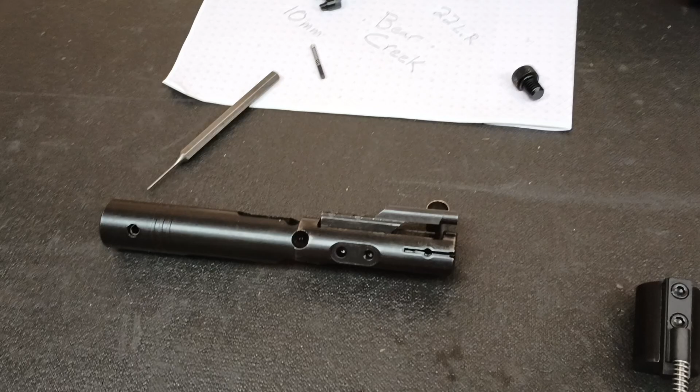The problem I found just with my tabletop review and inspection is that my extractor, this is the bolt carrier group for the Bear Creek .22 long rifle, but we can see pretty good with this one, if we get this to focus, how the extractor is supposed to work.

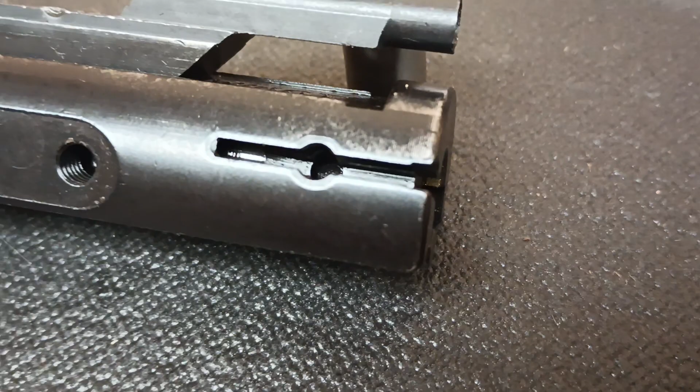It is supposed to reach around and grab the rim of the cartridge, hanging onto it so that we can pull the stuff back out of the action. The problem I had with this 10mm is the extractor stopped short. It did not claw around and grab a hold of the rim.

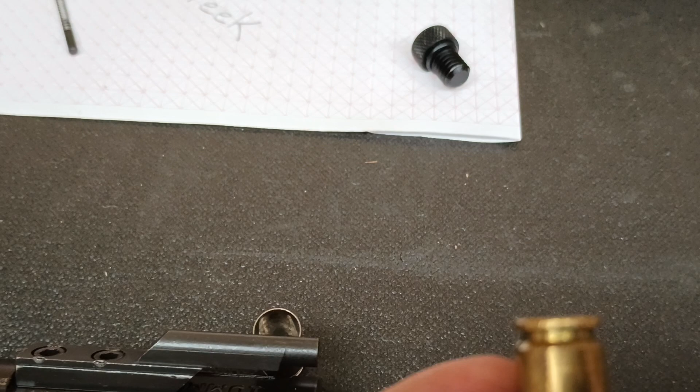So this rim thickness is about 0.050 to 0.051 inches in thickness, and so our extractor did not exit the bolt far enough forward to grab the rim.

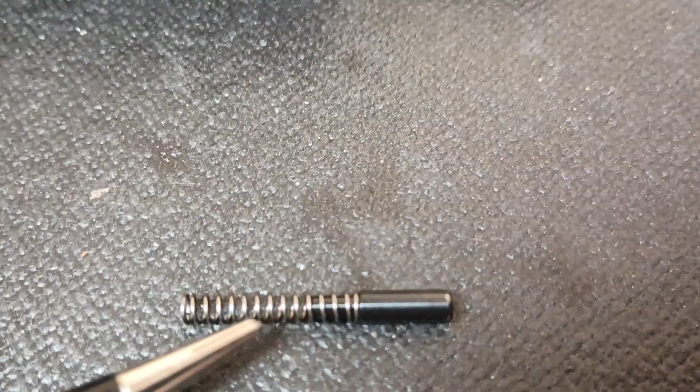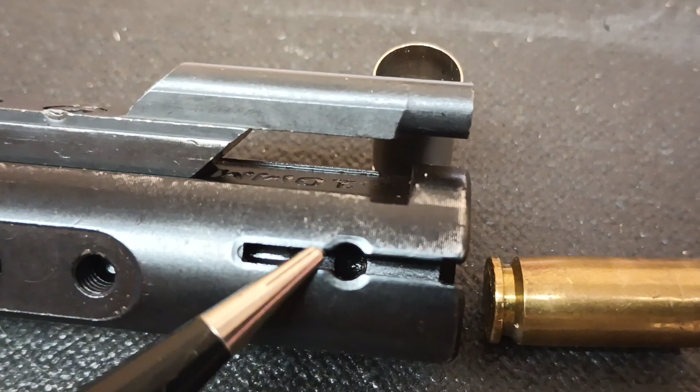So you can see this pocket here. The extractor fits in that pocket. There is this spring assembly. The spring and pin slide into this groove. The spring gets compressed, and then the pin pushes up against the back side of that extractor that is captive in that pocket.

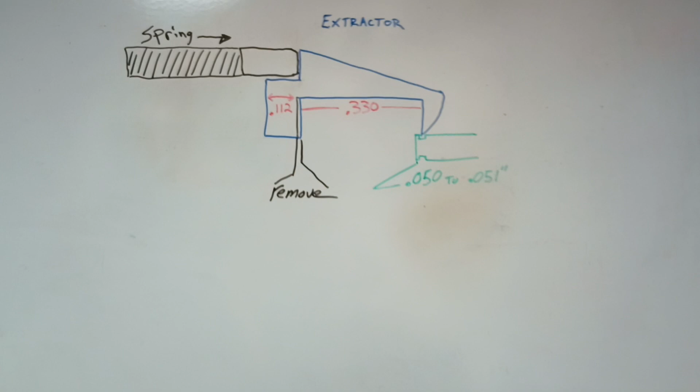If I'm not grabbing the rim, that either means that my pocket is in the wrong spot and needs to be moved forward, which is a little bit difficult to do in the field on the bench at home, or perhaps we can just modify our extractor so we've got about 0.330 inches worth of a gap between the claw and the foot of the extractor.

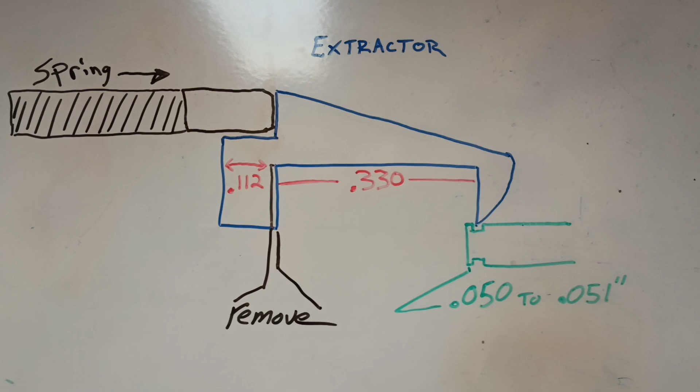So our rim again is about 0.050, and our spring tension pushes on the back. So therefore, if we remove this little sliver of metal in the back, that should allow the whole extractor to feed forward up against the bolt face and give us more extension beyond the bolt face to be able to grab the rim of the cartridge.

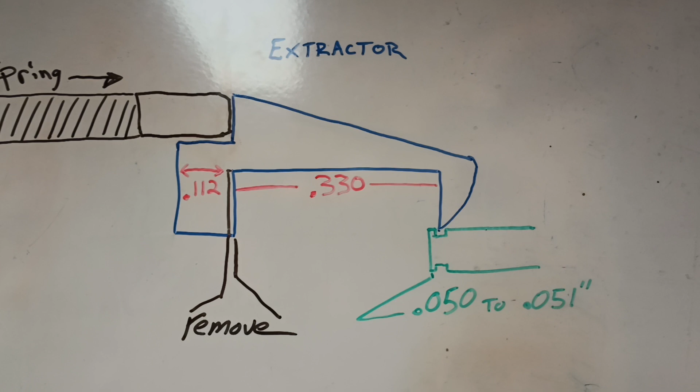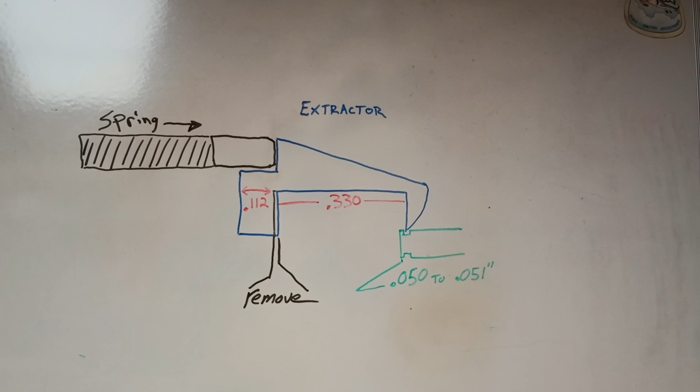So currently the foot of this thing is about 0.112 inches. So the trick is going to be hand fitting it, removing a sliver of metal and doing a test fit. So right now I know what my dimensions are. We've got that stuff mapped out, and we can grab our bench tools and start carving away.

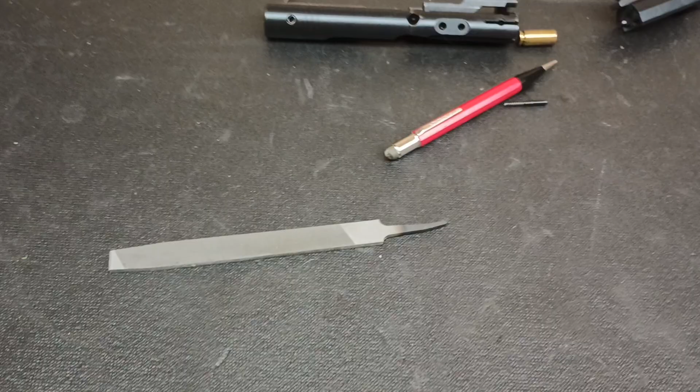So I'm going to spare you the boring details of material removal, since it is just a tiny little part, and as much as my camera's shaking, you'll probably get driven nuts, so be right back.

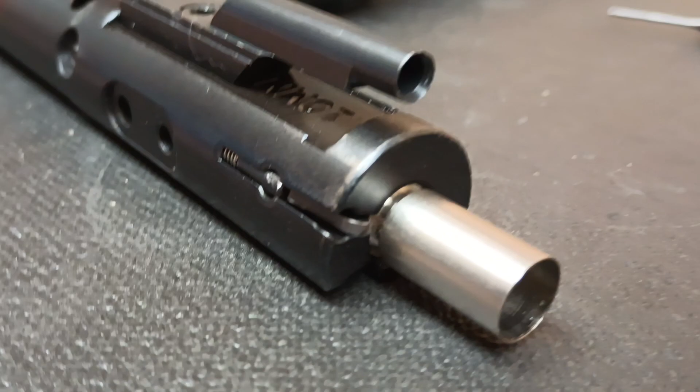Alright, I've removed a little bit of material off that back side on that foot, but we still aren't quite gripping that rim yet.

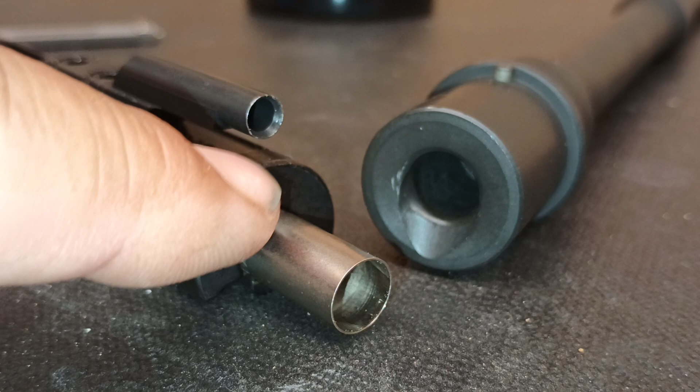Another observation I had is we are now extending a bit beyond our bolt face with that extractor. So one consideration is, and this is the spare barrel, since we're a blowback, our bolt face and our barrel breech are just kind of square cut. This is dished in though a little bit, so it's got a radius cut here with a feed ramp.

So I guess the consideration is making sure that my extractor does not stick out too far to become a problem with the seal when the bolt face comes in contact with the back of the barrel. These cartridges headspace internally. This is a 40 Smith & Wesson, so it's a little bit shorter.

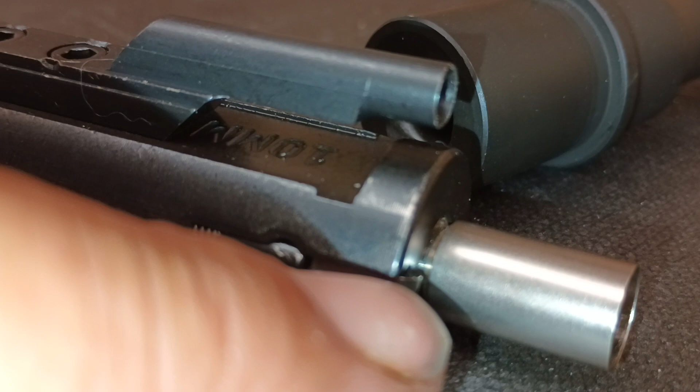So I'm going to continue to slowly remove a little bit of material and just keep track of how far out we're sticking beyond the bolt face here. But yeah, as you can see, this doesn't quite grab that rim yet.

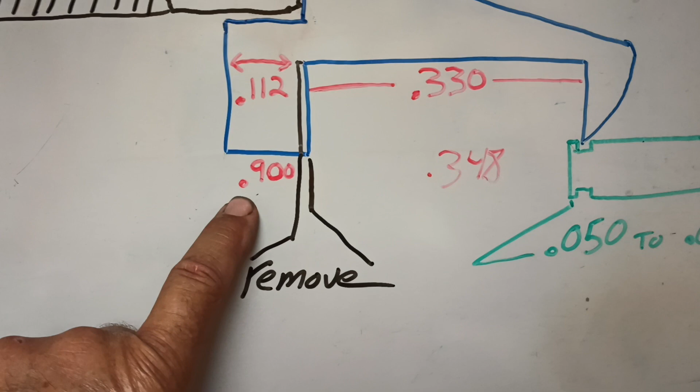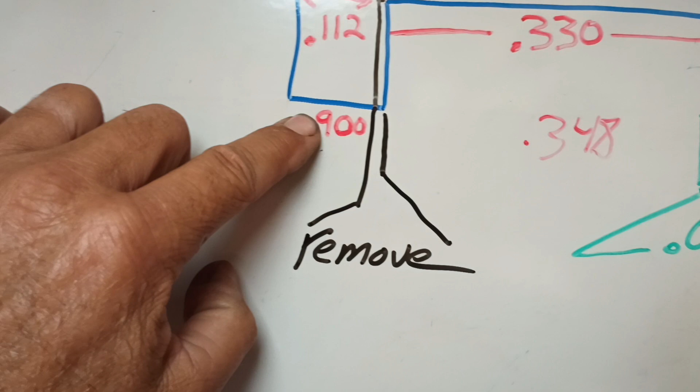Alright, we got this all back together now. And where we ended up at is we started at 0.112. That now is skinnied down to—or actually I moved the decimal place in the wrong spot, that would have gotten much, much bigger. Yeah, public school math, right? So this is 0.090. And then we are 0.348 gap now in between.

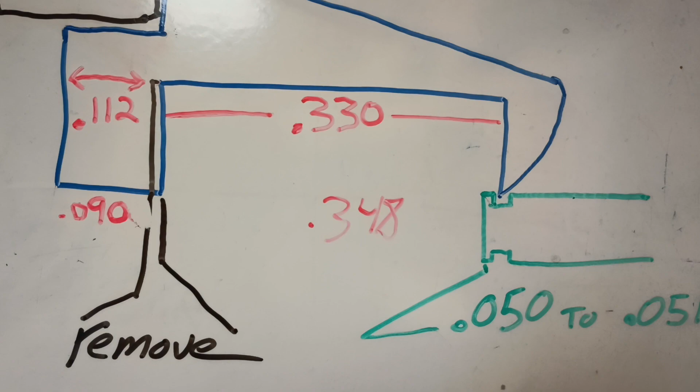So removing it off this back side seemed to do the trick. Let me throw this in the camera stand and steady things up a second, and we'll give you a closer view.

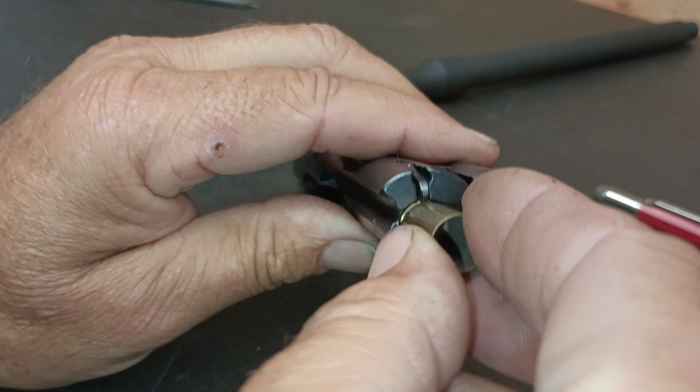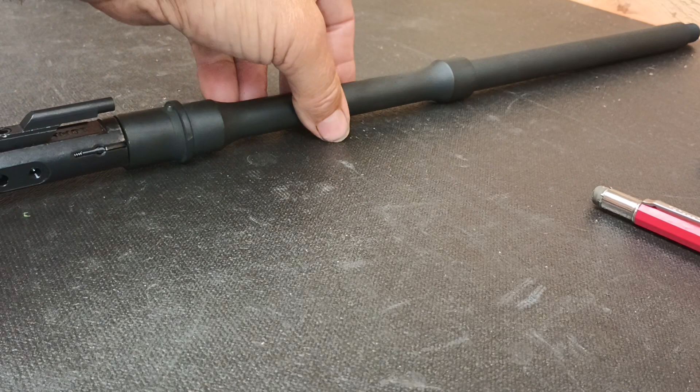Alright, so now we got the 10mm. This clips in and stays captive. You can still drag it off, but at least it's grabbing the rim now. And as far as clearances, it looks like we're still locking up tight.

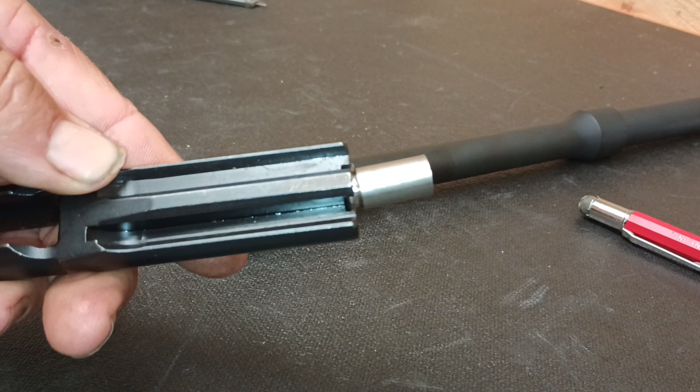We'll do some testing now that we can feel comfortable firing it. But if we would have left it the way it came shipped with that short extractor, I mean, granted, we're not supposed to shoot 40 Smith & Wesson with it because the rim is the only thing holding the cartridge up against the bolt face. But if we were to have a malfunction and have the cartridge get stuck...

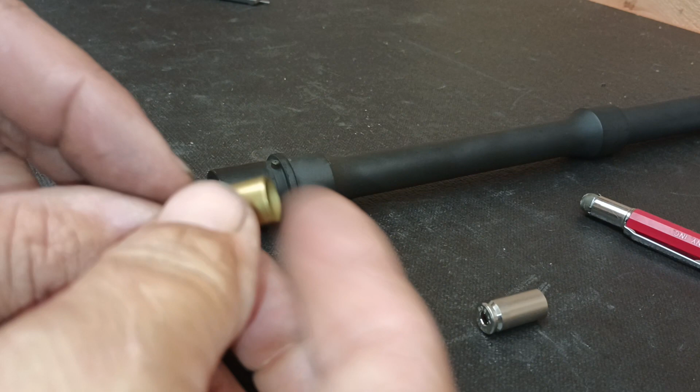Alright, I've got a 10mm resized here. So snap that in. But if we were to have a misfire where it doesn't ignite and we don't have the natural blowback, and we did have to manually extract the cartridge, or if we had some other malfunction, we definitely want this extractor to be grabbing a hold of the rim so that we can get our cartridge back out of the barrel.

Under normal firing operations, the extractor on a blowback probably isn't super critical because just the nature of firing is going to blow this cartridge out of the chamber. The pressure coming back from the gases leaving the barrel are going to keep the cartridge pushed up against the bolt face while it's traveling back.

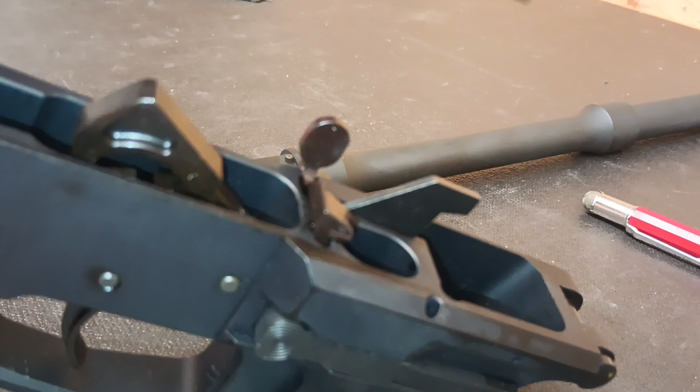And in that brief time frame while it is rolling back, it will eventually come into contact with the ejector, which will knock that cartridge off the face of the bolt, spitting it out through the ejection port if everything works correctly.

So next up, let's get this 10mm outside, do some shooting.

So we'll conclude the let's fix it ourselves and not wait for Bear Creek's reply. I mean, granted, it's only been 12 hours or 14 hours, I think, since I sent them the email. So no reply back from them yet on the fix for the problem.

But a little bit of a file, some patience, slowly removing material. And it did turn out that this extractor appeared to be identical to the extractor that's in my Bear Creek 22 long rifle. So worst case, if I did bugger that up and need to get a replacement, I think what they did is just grab some off-the-shelf common items, which if I were manufacturing this, that's exactly what I would do.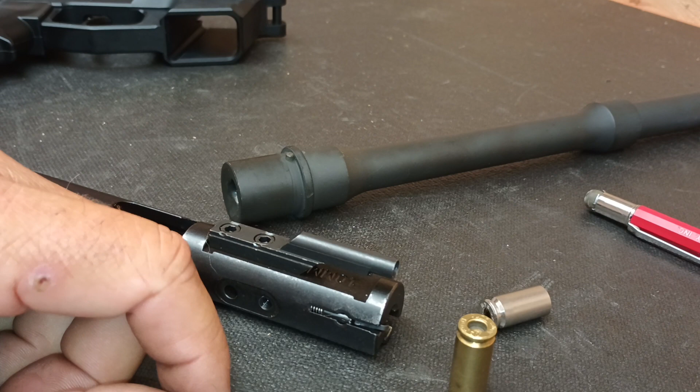You know, why totally reinvent a specific part when you're trying to keep your cost point down where the average consumer can afford one of these things?

So yeah, good job, Bear Creek. Just needed a little bit of fitting and you'd have a lot more satisfied customers. But otherwise, all in all, I have no complaints. Thank you, Bear Creek.